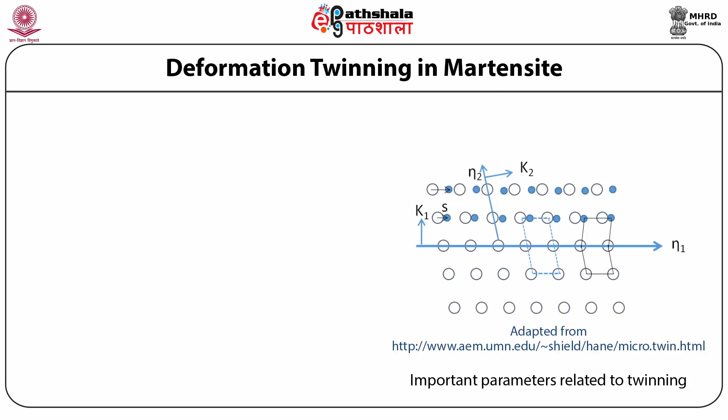Deformation twinning in martensite. Since twinning is the cause of shape memory effect, it basically occurs in shape memory alloys. So students, it is important to understand and predict the orientation of twins. A twin interface is characterized by mirror geometry where one grain is sheared with respect to the other. This figure shows the important parameters related to twinning.

Mathematically, a twin is denoted by its elements, and these elements are K1, which is the twin plane normal; eta 1 corresponds to the direction of twin shear. K2 is the second undistorted plane. Eta 2 corresponds to an undistorted vector in the plane K2. S corresponds to the magnitude of twin shear.

Now, students, note that in the figure, the open circles and the closed circles represent the lattice points. If a twin is formed, then both the open and closed circles must have the same crystal structure. However, the closed circles would be sheared with respect to the open circles. A twin is formed during transformation only when the two variants of the martensite phase coexist. The twinning operation must allow the original lattice to be restored.

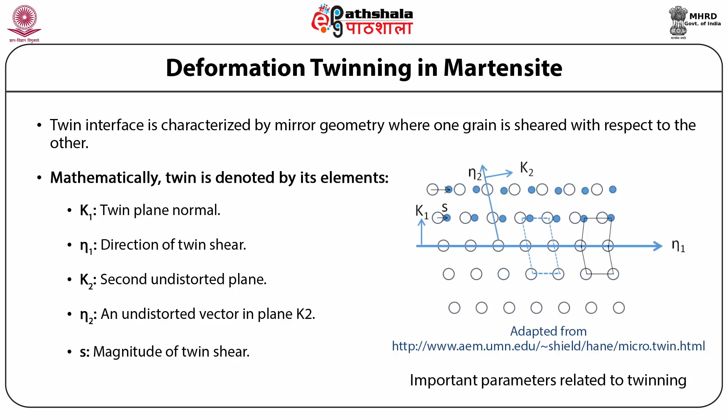Twinning in martensite. A twin is formed during transformation only when two variants of the martensite phase coexist. The original lattice must be restored by this process. Mathematically, two variants denoted by I and J can form a twin only if they satisfy the twinning equation and the symmetry matrix condition. Two solutions exist for the twinning equation, and twinning elements can be found for these solutions.

Twin types. There are two types of twins. Type 1: two lattice vectors lie on the K1 plane and the third lattice vector is parallel to the eta 2 direction. In this case, K1 and eta 2 are rational indices, and the two twin crystals are related by a mirror symmetry. They are also known as reflection twins.

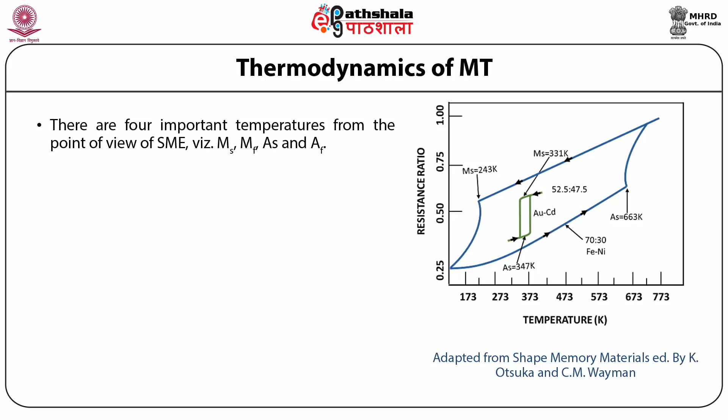Thermodynamics of Martensitic transformation, or MT. Martensitic transformation is defined by four important temperatures which have been explained earlier, and these are MS, MF, AS and AF. These transformation temperatures can be determined by measuring some physical properties.

So students, note that this figure shows the variation of the physical properties to determine the characteristic temperatures of Martensitic transformation. This shows the resistance ratio, and the change in the slope provides information about the characteristic temperature.

Another important thing to note in this figure is that one material, gold cadmium, has a very small transformation zone of around 15 Kelvin, while the other material, iron nickel, has a very large transformation zone of approximately 400 Kelvin. As discussed earlier, when the transformation zone is small, the driving force is also small, and hence the process is reversible, which is also called thermoelastic.

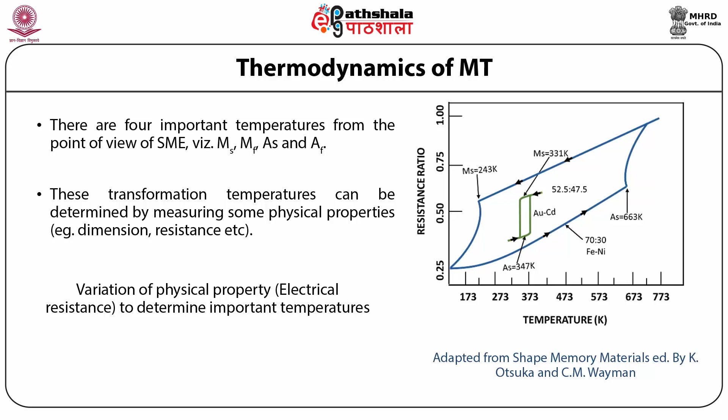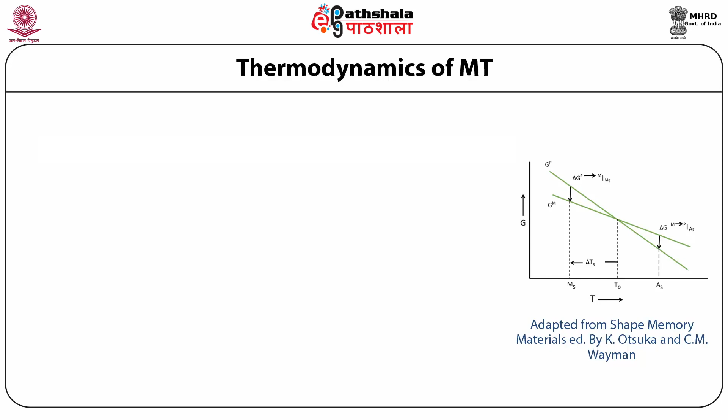Thermodynamics of MT. So we are continuing with the discussion over thermodynamics of Martensitic transformation. So students, to represent the thermodynamic equilibrium temperature between the two phases, the Gibbs free energy is an important parameter. So Gibbs free energy of the two phases are being shown in this figure. The plot for the two phases intersect at the temperature of T0, where T0 can be said as the temperature at which the two phases are in thermal equilibrium.

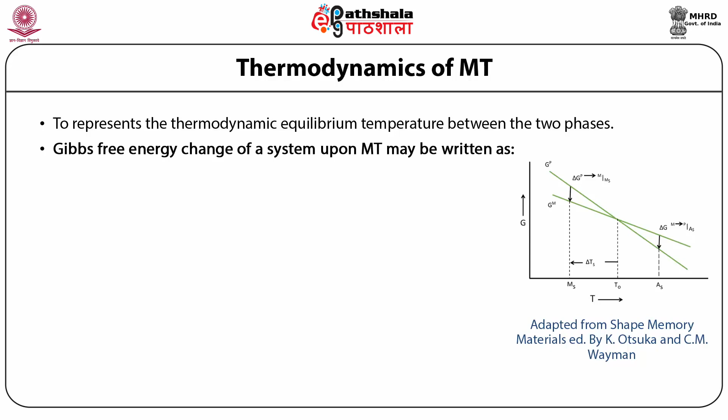However, this equilibrium temperature T0 cannot be measured directly. So, as you can see from this figure, delta GC is the chemical energy term, delta GS is the surface energy term, delta GE is the elastic energy term, and delta GNC is the non-chemical energy term. So all these terms are summed together to give the total Gibbs free energy of a system when the Martensitic transformation

takes place. That is, we can write delta G to be equal to delta GC plus delta GS plus delta GE. We can write delta GS plus delta GE to be equal to delta GNC, where delta GNC is of the same order as that of delta GC. Thus, a nucleation and growth kind of process is required for the transformation to proceed. Once the nucleation of martensite phase takes place in the parent phase during cooling, it can grow only when the circumstances are right, meaning only when the driving force, that is the temperature difference, is larger than the elastic energy around the nucleated martensite phase.

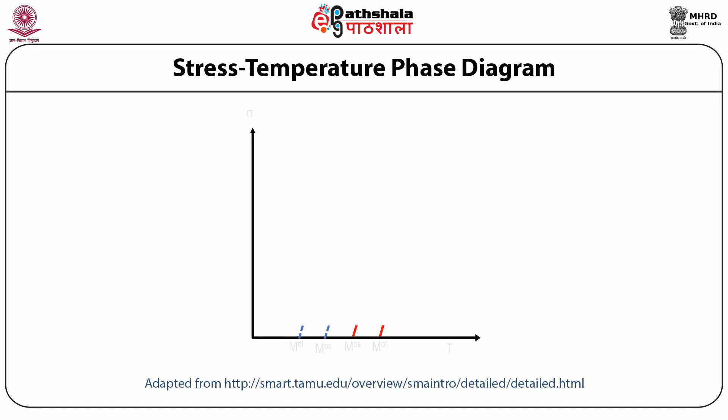Stress temperature phase diagram. Now, with respect to the phase diagrams, we can talk about a different kind of phase diagram for Martensitic transformation. It is the stress temperature phase diagram. Since the martensite interacts with the stress field, application of stress is bound to have an influence on the characteristic temperature of Martensitic transformation. This is shown schematically in this figure, and here, as you can see, the stress temperature phase diagram shows how the stress is related to the temperature, which is associated with shape memory alloys.

So students, note over here that the x-axis shows the usual transformations associated with the temperature. However, the y-axis represents the effect of stress on these transformations. It also hints at the formation of stress-induced martensite, where martensite can be produced only by applying stress and without changing temperature.

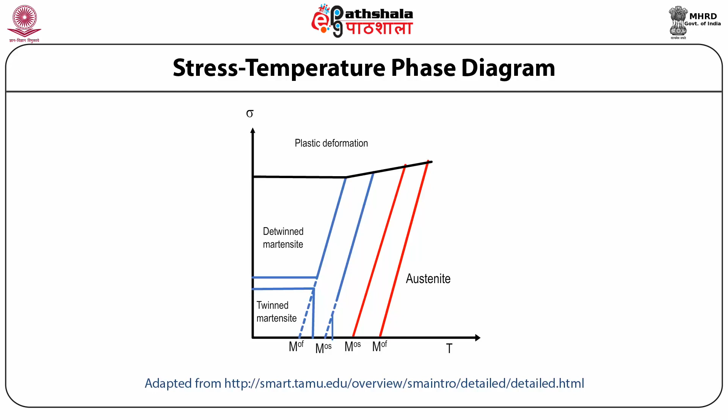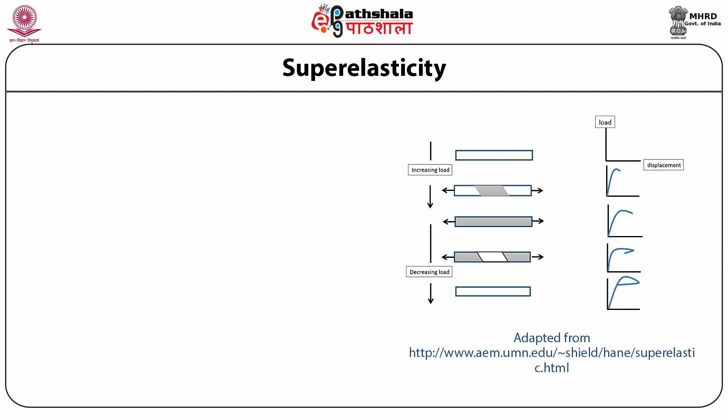Superelasticity. Superelasticity or pseudoelasticity is an effect which is usually associated with shape memory alloys. So students, here we will be discussing superelasticity. This figure shows the schematic of the evolution of microstructure with increasing and decreasing load, where the light color is the austenite and the gray color is the martensite.

Correspondingly, the load displacement curve is also shown over here. If we start with a completely austenitic microstructure and start to apply stress, then Martensitic transformation starts to take place, and this is nothing but the stress-induced martensite. Once the transformation is completed to martensite and the load is removed, the strain is seen to drop. Concomitantly, the microstructure is found to see the transformation from martensite to austenite. In fact, upon the complete removal of the load, total strain is reversed and original microstructure is restored.

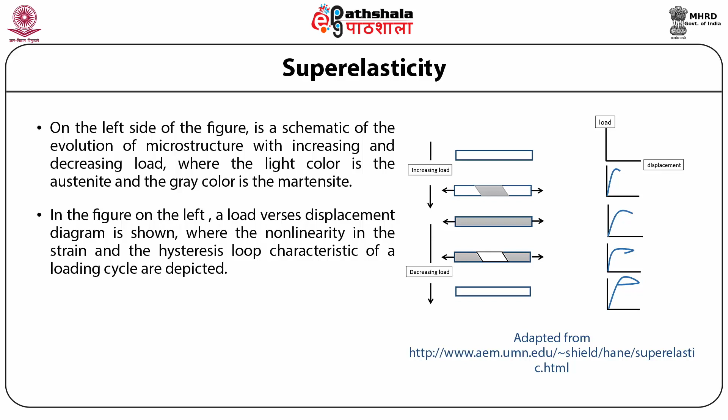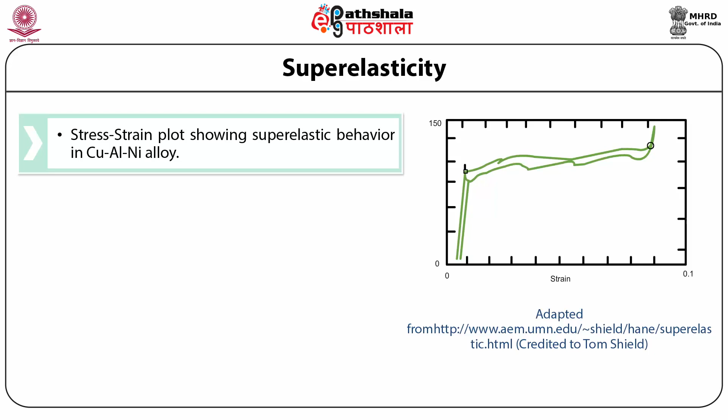Superelasticity. A schematic stress-strain plot is shown in this figure for copper, aluminium, nickel alloy. Here again we see the superelasticity effect in the single crystal alloy. In this particular material, strain up to 8.5% was found to be recoverable upon unloading. So what will happen when we keep loading the material even after complete transformation into martensite phase has taken place? The answer is this plot.

The sharp rise in the stress at strains above 8.5%, that is the top right end of the plot, leads to slipping instead of martensitic transformation, and hence permanent deformation begins to set in. This implies that these strains will not be recovered. The above plot was obviously obtained at temperatures where austenite exists, that is T greater than MS. In fact, in practical applications, the temperature needs to be sufficiently above AF to observe complete strain recovery upon unloading.

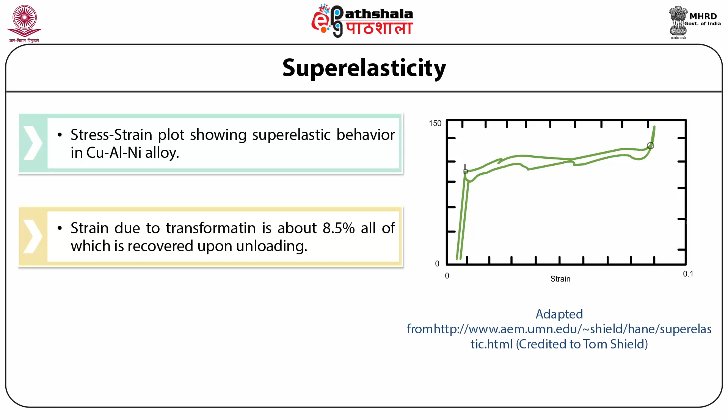SMA and superelasticity. So now, students, the question arises: how does this plot change when the temperature is changed? The answer to this question is this plot. At intermediate temperature, that is slightly above AF, superelasticity or SE or pseudoelasticity is observed, as seen in curve C.

At very low temperature, and the curve corresponds to B, that is T2 is less than MS, martensite already exists in the microstructure. However, such systems can still accommodate some strains by allowing one variant of the twin to grow at the expense of all other variants. If the load is removed after partial or complete transformation to one variant of martensite, then the strain does not go away automatically. However, the strain does go back to zero upon heating.

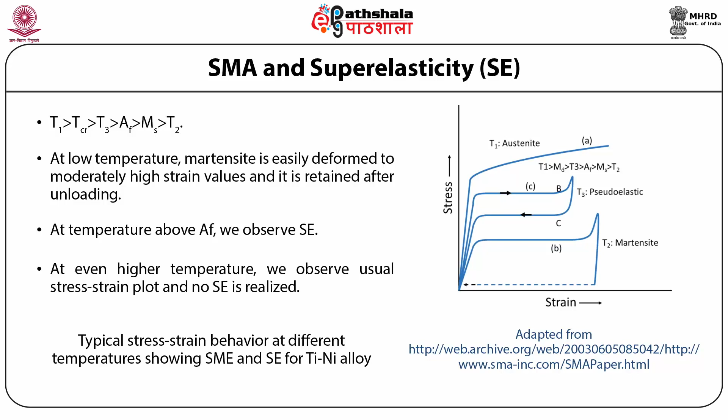SMAs and superelasticity, SE. When copper zinc tin alloy single crystal is tensile tested at temperature below AF, strains are permanent, but they recover after heating above AF. This is SME. When tested at temperature above AF, strains recover by unloading. This is SE. Thermodynamic equation shows that higher elastic energy favors MT. Stress-induced martensitic transformation, or SIM.

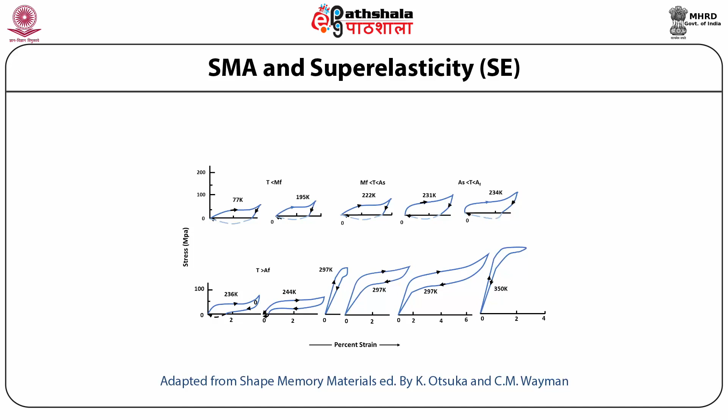So we are again continuing with the discussion over shape memory alloys and superelasticity. Similar behavior is observed for copper zinc tin alloy, and the stress-strain behavior for this alloy is shown in this figure. Note that for this material, MF is 208 Kelvin, MS is 221 Kelvin, AS is 223 Kelvin, and AF is 235 Kelvin. So in this plot, the solid lines show the stress-strain behavior on loading and unloading, whereas the dashed lines show the strain path upon heating at temperature above AF.

Here again we see two distinct behaviors, at temperature below MF and at temperature above AF. At temperature below MF and also for temperature below AF, as long as the starting material is in martensite phase, we see that upon loading and unloading, the total strain is not recovered. However, when the sample was heated above the temperature AF, the total strain was recovered. This behavior leads to the shape memory effect.

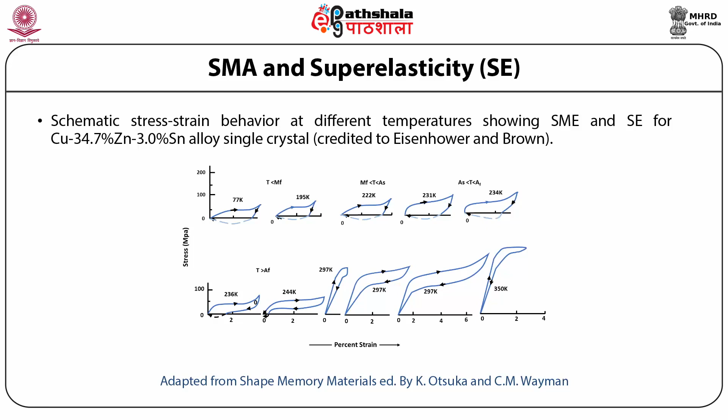superelasticity. Orientation dependence. Twins have crystallographic geometry and hence some will be preferred under certain loading directions while others will be preferred under other loading directions. Superelastic strain for a particular orientation corresponds to the plateau length in the stress-strain curve. Transformation strain for different orientations can be calculated from the Bain strain model and it shows strong orientation dependence.

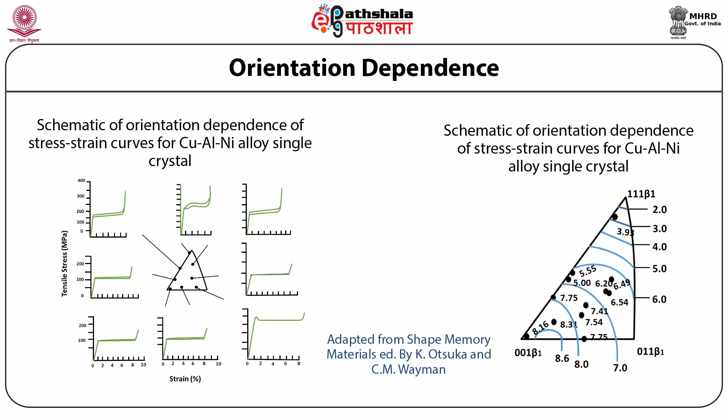Stress-induced transformations. Martensitic transformation proceeds by a shear-like mechanism and thus it interacts with the applied stress. Shear stress always assists transformation, but a normal stress may assist or oppose depending on various factors including volume change and sign of stress. Hence, the effect of stress may be completely different in two different materials. For example, hydrostatic pressure aids the transformation for gold cadmium while it opposes it for iron nickel alloy.

Thermodynamics governs that martensitic transformation can also take place by the application of stress. So, the transformation from the parent phase to the martensitic phase on application of stress depends upon the temperature also. The structure of various phases can be determined by neutron diffraction. As much as 18% of superelastic strain can be obtained.

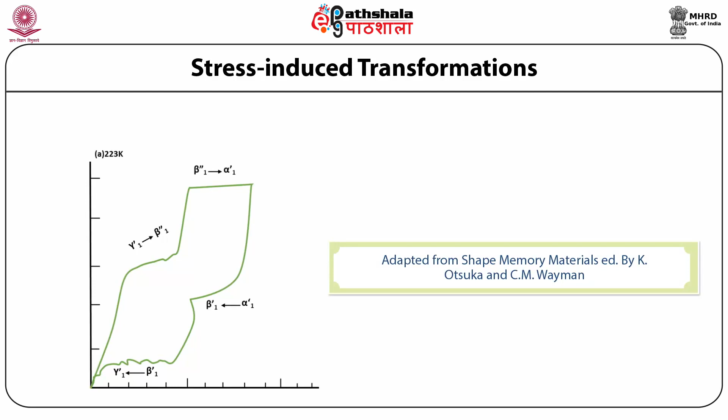Stress-induced transformations. This figure shows another example of stress-induced transformation. Here stress was applied to copper aluminium nickel alloy single crystal. At a particular stress, the transformation begins from gamma 1 prime to beta 1 double prime, and this is evident by the change in the slope of the stress-strain plot at this critical point. This system is interesting because beta 1 double prime is an intermediate martensitic structure and the final structure is alpha 1 prime.

When the microstructure gets completely transformed to beta 1 double prime, then further loading causes the transformation to alpha 1 prime. Thus, in this system, we see two transformations and two critical stress values.

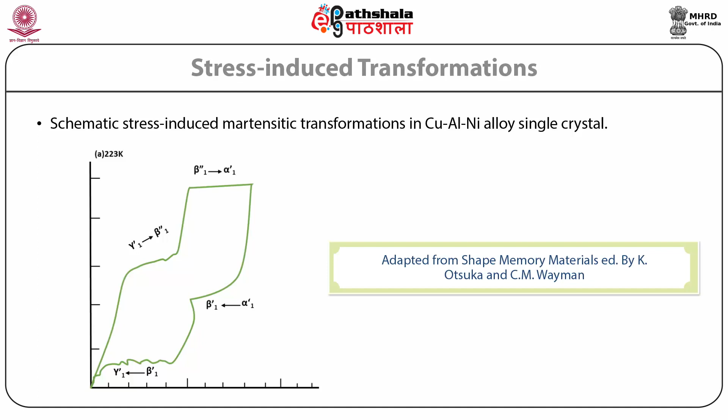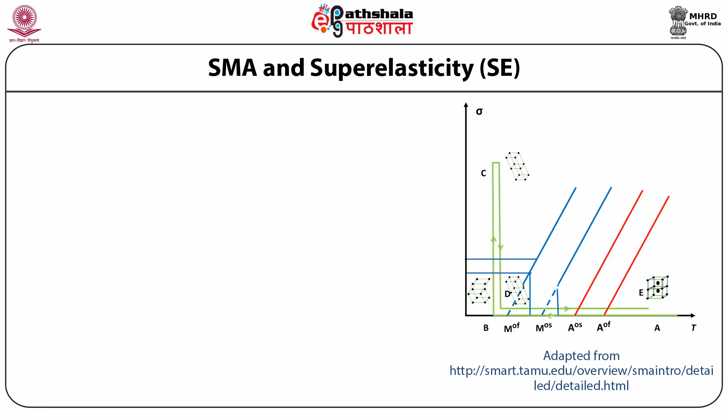Now, let us discuss the mechanism of shape memory effect, that is SME. So, till now, we are in a position to revisit the stress temperature phase diagram for shape memory alloys. We can even draw the transformation path which depicts the various properties, that is SME, SE, SIM, and these have been shown in this figure, which shows the stress temperature phase diagram for shape memory alloys, showing the transformation during the shape memory effect.

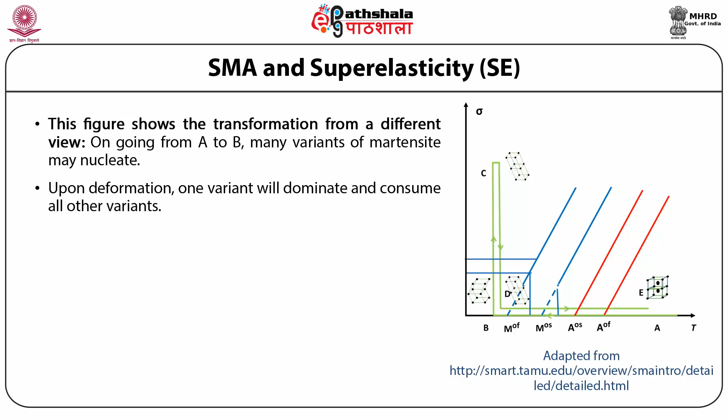So students, note from this figure that on going from A to B, parent phase gets completely transformed to martensite phase. During this transformation, many variants of martensite may nucleate and grow. However, on going from B to C, upon loading or applying stress, one variant of martensite will dominate and consume all other variants. Upon unloading, there will be no change in the microstructure and hence no change in the strain.

However, on going from D to E, the temperature is increased to the level where martensite is not stable and only parent phase can exist. Since the parent phase has higher symmetry, it has only one variant, and hence all the changes in the shape given during B to C are regained as the structure and microstructure come back to the starting point. This transformation path shows the changes and also details the mechanism following the shape memory effect.

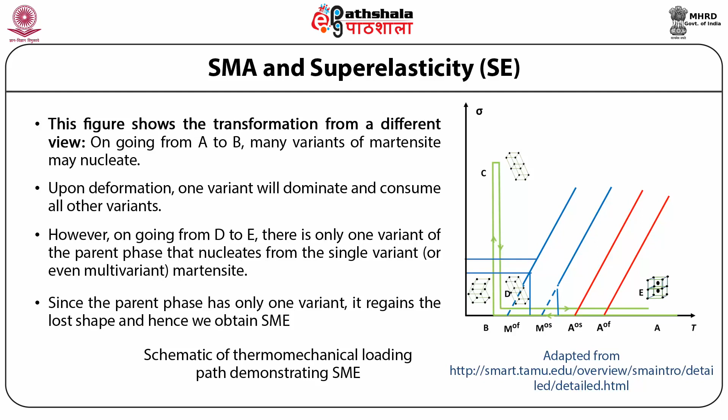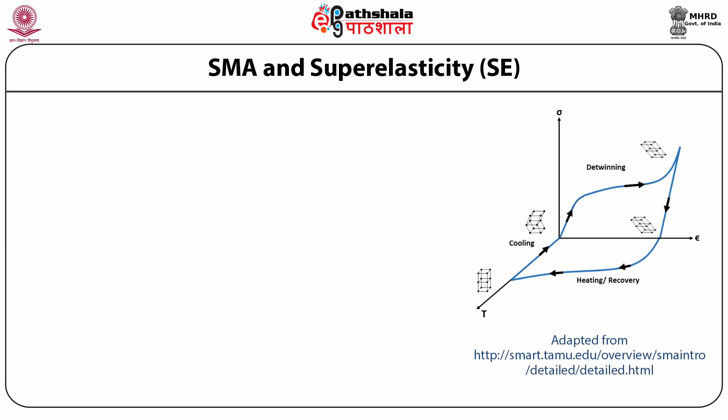So the bottom line is that since the parent phase has only one variant and the martensite phase has several variants, we see shape memory effect, SME, and superelasticity. This stress temperature transformation also involves the straining of the material, and hence a more complete picture is obtained when we add another axis for the strain. This is clearly shown in this figure. So this figure shows the transformation from a different point of view.

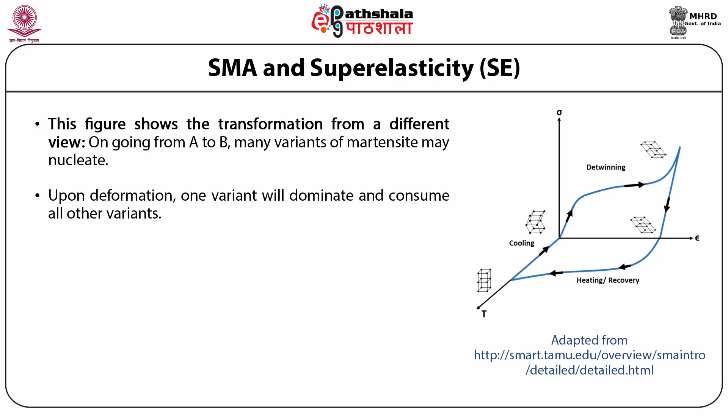When we cool from the parent phase to below the MF temperature, we obtain several variants of martensite which are related to each other by twinning. Upon loading, one variant dominates and starts to consume other variants until complete detwinning occurs, as shown in the figure. So, at this point, if the load is removed, no micro or macro structural changes take place. However, there is a permanent strain remaining in the material. Upon heating from this stage, the strain reduces along with the transformation from martensite to parent phase, which is also very easy to understand using this figure.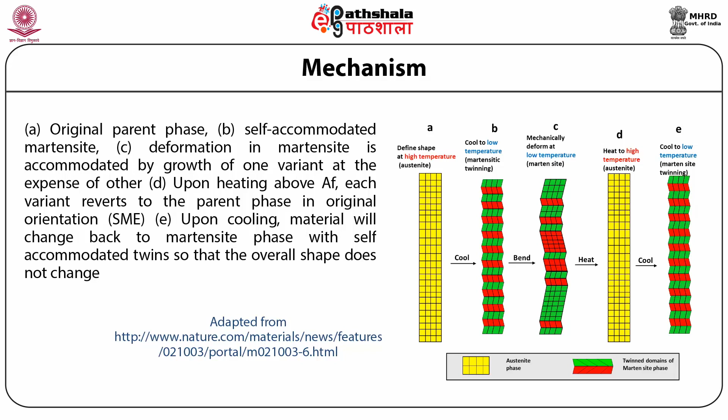Since the parent phase has higher symmetry, it has only one variant, and hence, although the deformed shape can have multiple shapes depending on the combination of various martensite variants, the high temperature parent phase has only one shape, and it will be the shape given to it at high temperature. This has been shown in figure D. Upon cooling again, the material will change back to martensite phase with self-accommodated twins, so that overall the shape does not change.

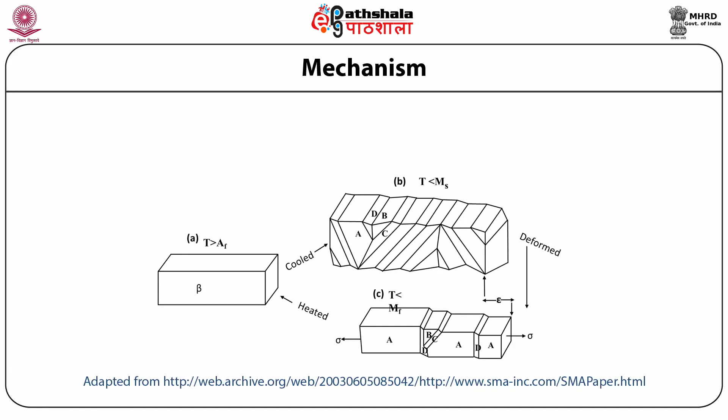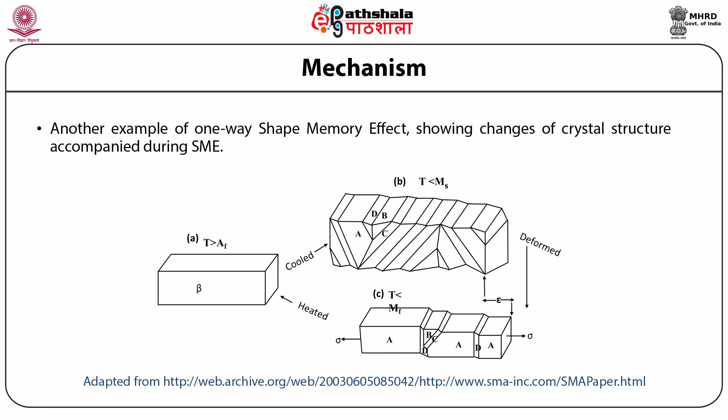So students, let us summarize what we have learned in this module. First, deformation twinning in martensite phase along with its types has been discussed. Second, thermodynamical analysis of martensite transformation, including the variation of Gibbs free energy for parent and martensite phase, has been done. Third, superelastic behavior and shape memory effect in copper aluminium nickel alloy single crystal has been explained along with orientation relationships. Fourth, the detailed mechanism of one-way shape memory effect is discussed, showing changes at micro and macro levels during transformation.